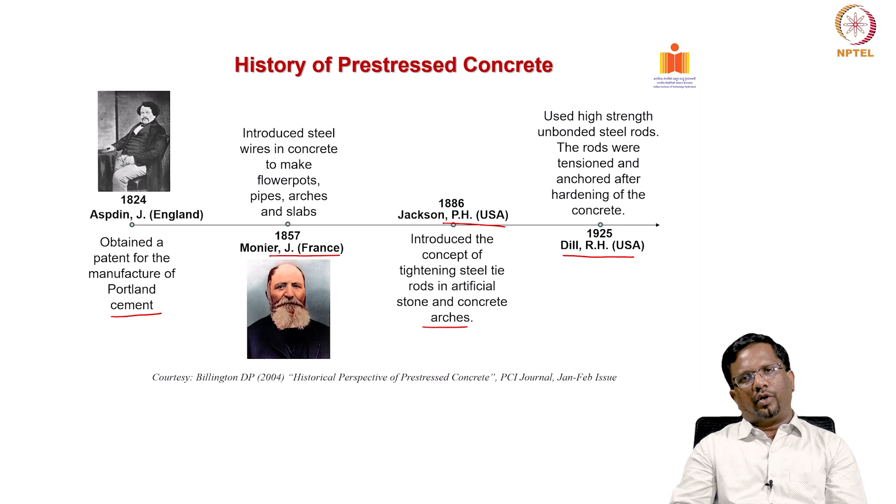Then in 1926, Eugene Freyssinet from France, also called the father of prestressed concrete, because he has been credited with employing high tensile steel wires as high as 1725 megapascal.

In earlier attempts of prestressing, they were not very successful because of losses in prestress. Freyssinet understood that if you use high tensile steel wires, you can go for a large amount of tension. Even if some tension is lost due to loss of prestress, a significant amount of prestress will still be left in the concrete, so it will not adversely affect performance.

He also developed conical wedges for end anchorages, and he also developed double acting jacks. These are some of the very significant contributions of Eugene Freyssinet - that is why he is also called the father of prestress.

Then in 1938, Hoyer in Germany invented a very nice method called the long line method of producing precast elements and prestressing them. That's a technique called pretensioning method, which we will discuss in detail, along with post-tensioning, in the coming modules.

Hoyer is the one who invented this long line method of pretensioning, used to produce pretensioned precast elements. Then in 1940, Gustav Magnel from Belgium developed anchoring systems for post-tensioning using flat wedges, and then prestressing applications flourished throughout the world.

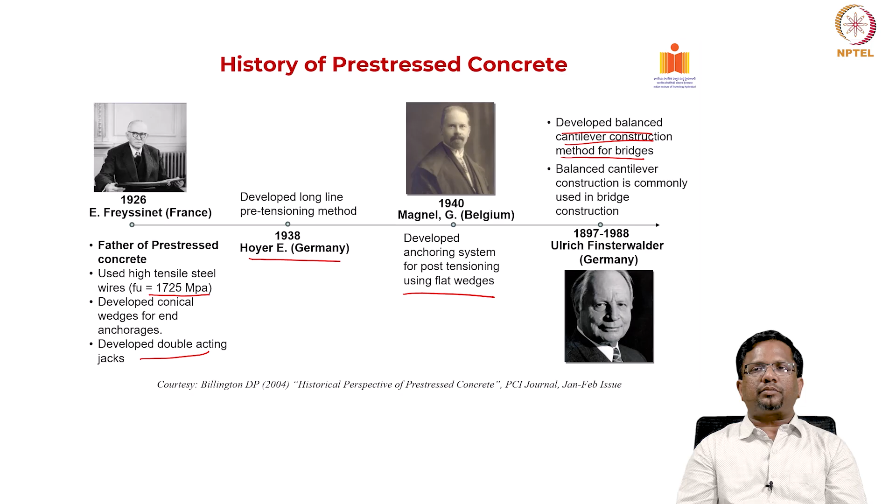Professor Gustav Magnel illustrated the concept of prestressing through a nice stacking of books, and he expanded the ideas of Eugene Freyssinet to the English speaking world, and also characterized the potential of prestressing. This is one of the very famous applications, Walnut Lane Bridge in Philadelphia.

It was one of the first bridges using prestressing, built in the year 1951, with a main span of about 48.5 meters. He helped in promoting the applications of prestressing in North America.

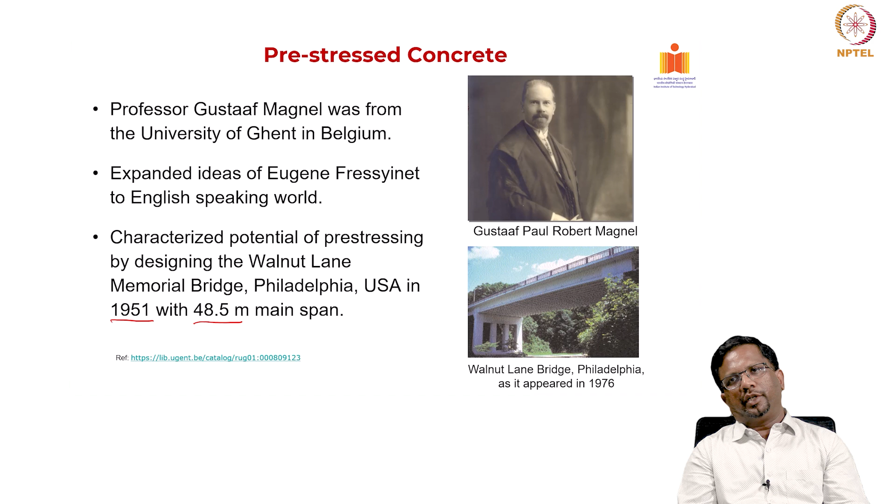Now let us see the variety of applications in India. You can see that the applications of prestressed concrete in India started as early as the 1940s.

The first applications were for airport hangars built by the British Indian Army at Meerut and Karachi - Karachi being in erstwhile India before partition. That was the first application of using pretensioned elements for constructing long span roof elements for building airport hangars.

Then for prestressed concrete bridges, the first bridge was built in 1948, using pretensioned precast concrete girders of 60 feet and 40 feet spans.

These were built to connect the Assam rail link project, a very famous project which provided connectivity from Assam to the rest of India, and they were used for constructing a variety of bridges using prestressed technologies across the rivers Tista, Torsa and Sankosh.

Another classical example is the Pamban Road bridge at Rameshwaram, which is a very classic example of using prestressed concrete, particularly in a marine environment.

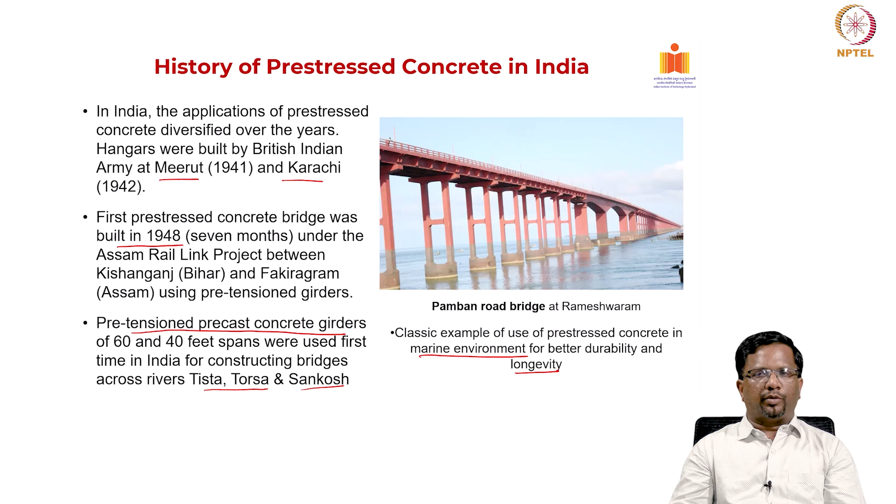Engineer Karnail Singh is again one of the pioneers in promoting prestressed technology in India, and he was actually the chief of this Assam rail link project that we discussed in the previous slide.

This is also a nice application, the Kolia Bhomora bridge in Tezpur, Assam. You can see this is a prestressed concrete box girder bridge done using segmental cantilever construction, where precast segments are progressively prestressed from one end, either end. That is why it is called balanced segmental cantilever construction. There were multiple spans like this, built using prestressed concrete box girder with segmental cantilever construction.

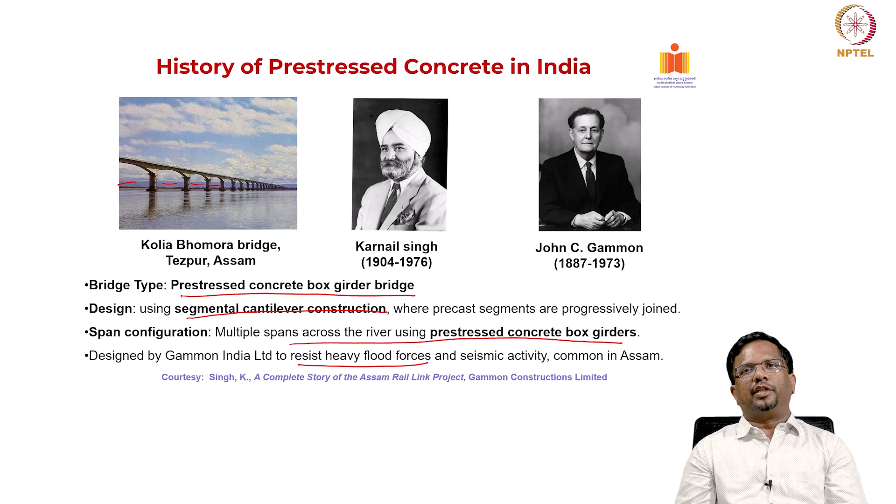This bridge was designed by Gammon India, and another important pioneer in promoting prestressed concrete application in India is John Gammon, who started Gammon India Limited. This pioneering Kolia Bhomora bridge was designed by Gammon India, built to resist heavy flood and seismic activity, which is very common in Assam. So these are some of the pioneers who have helped in promoting prestressed applications in India.

We also have another important consultant, Stup Consultants, one of the pioneers in promoting precast and prestressed construction in India. This is a very nice example of how we can use prestressed technology, a very interesting application which is a prestressed aqueduct.

Basically it transports canal water from one end to the other. The total length of this entire aqueduct is about 947 meters, and each span is about 41.5 meters. It runs for almost a kilometer and has been in operation since 1985. This is the first aqueduct in India done using match precast segmental construction, meaning the elements were made so that the end surfaces match when put together.

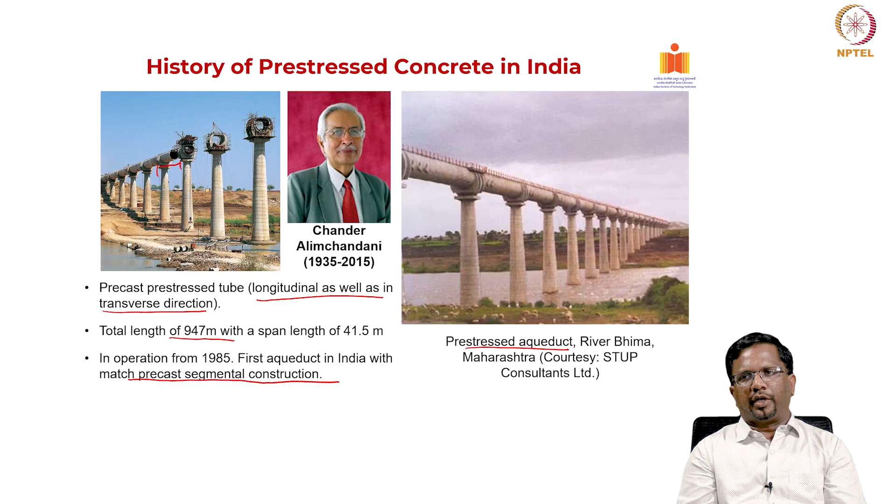This also has both longitudinal as well as prestressing in the transverse direction. Mr. Chander Alimchandani is one of the pioneers who was very instrumental in promoting precast and prestressed applications in India, and as I've mentioned, Stup Consultants is again one of the pioneers in promoting prestressing in India.

Now let's talk about why we need prestressing. This is a good example to illustrate how we can use prestressing and how it can be used for increasing the load before the system is going to crack. Now I have three cases.

The first case is a plain concrete beam, 6 meters in length. The cross section I will show you in the next slide. Now, if I start increasing this load W1, we want to see at what load it is going to crack. Now the second example is the same beam, same cross section.

Now if I squeeze this beam by applying compression like this, with an amount of compression of 750 kilonewton, I want to understand in the presence of this compression force, at what load the same beam, same span, is going to crack. This is a case of concentric prestressing.

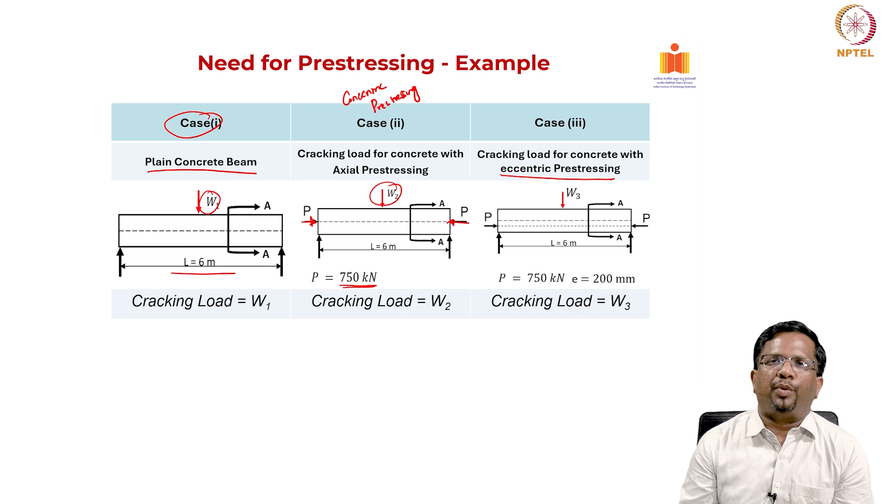The third one is an eccentric prestressing, where we can get more benefits. Same compression force, but now I am going to apply it at an eccentric distance - this is the eccentricity of the prestressing force. This eccentricity E I have taken here as 200 millimeters. Let us understand these three cases and see the effect of this prestressing.

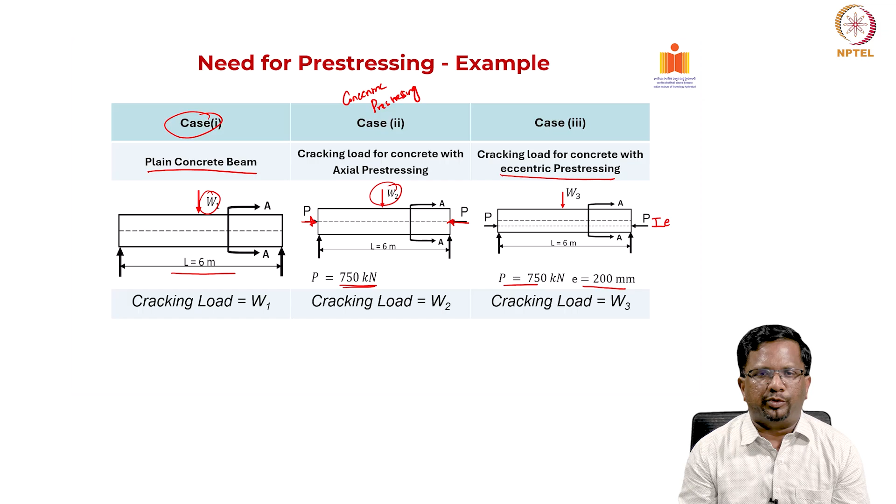One case is applying the prestress at the CG of the cross section along the length of the beam, and the second case is applying the prestressing at a distance of eccentricity 200 mm from the CG of the beam. Let us see how these load capacities compare before cracking. Now let us look at the first example, a plain concrete beam, with a section of 300 mm by 500 mm.

And I am also taking this as 40 megapascal. So, 40 megapascal is the cylinder compressive strength. Now, you can ask me what is a cylinder compressive strength.

Typically we use cube for testing concrete material strength in compression, but it does not exactly represent the true material strength of the concrete. So I have taken here cylinder compressive strength, which is a true representation of the material behavior of the concrete.

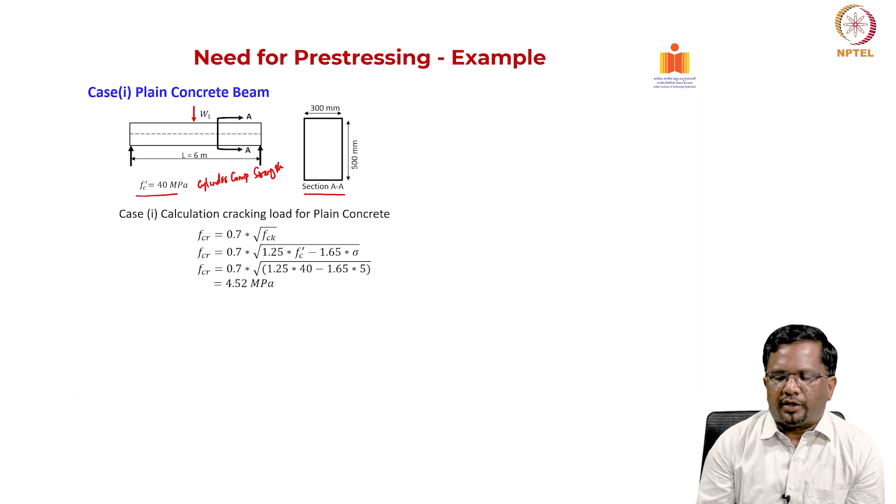Now from basic flexure theory, from Euler bending theory, I can calculate the stress in the concrete by F by Y is equal to E by R. So this is your basic bending theory.

Now I want to calculate at what moment it is going to reach the flexural tensile strength. What is this F? F here should be flexural tensile strength. So what is flexural tensile strength? The flexural tensile strength is nothing but modulus of rupture, which is what this FCR is, which is modulus of rupture.

As you can see, the modulus of rupture is a flexural tensile strength, which is typically given by 0.7 square root of FCK. Now what is FCK? FCK is a characteristic compressive strength of concrete, and this is a cube compressive strength.

Now there is a relationship between cylinder and cube compressive strength. The cube strength is typically 1.25 times F prime C, and I have to subtract also 1.65 times the standard deviation, because characteristic strength is the strength of the material only. You are expected to have 5% failure. It is 95%. 95% of the samples are expected to have value above the characteristic strength. You know that, you have studied in reinforced concrete design.

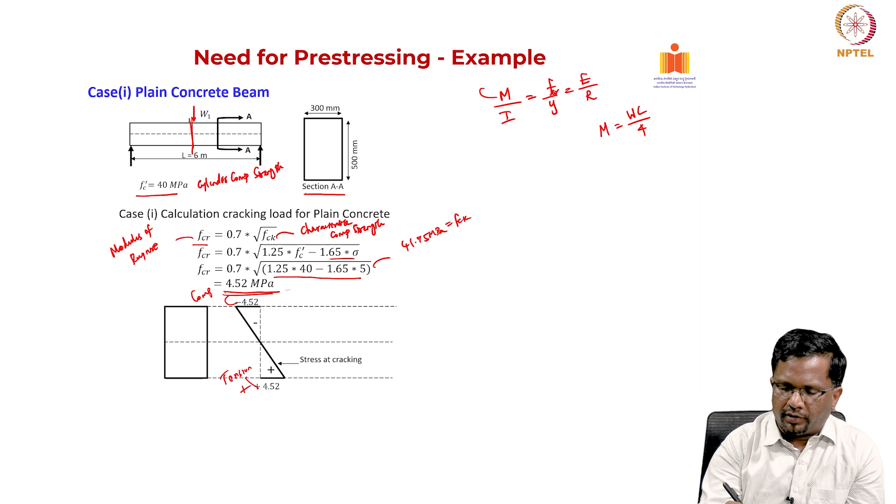So again, I am taking this as tension and this as compression. So I am taking positive as tension, compression is negative. So you see here, if you go back and put your basic bending equation, we can write the stress divided by the distance of the extreme fiber y from the neutral axis should be equal to m by I, or in other words, moment is given by sigma into Z, where sigma is your stress.

Now we want to calculate what is the cracking moment. So what is the cracking moment we want to calculate? Cracking moment is stress multiplied by section modulus, which is Z we know, which is equal to I by Y.

So you can see here, now what is the stress at which it will crack? We have calculated flexural tensile strength is 4.52 megapascal. So I put this 4.52 here. And what is the section modulus? Section modulus for this particular section is Z is going to be B H square by 6.

So I substitute B, H is 500 square, and then the units, everything we are multiplying it. And I want it in kilonewton meter, that is why I multiplied by 10 to the power of minus 6. So if you substitute that, you will get the moment at which it is going to crack is going to be 56.5 kilonewton meter.

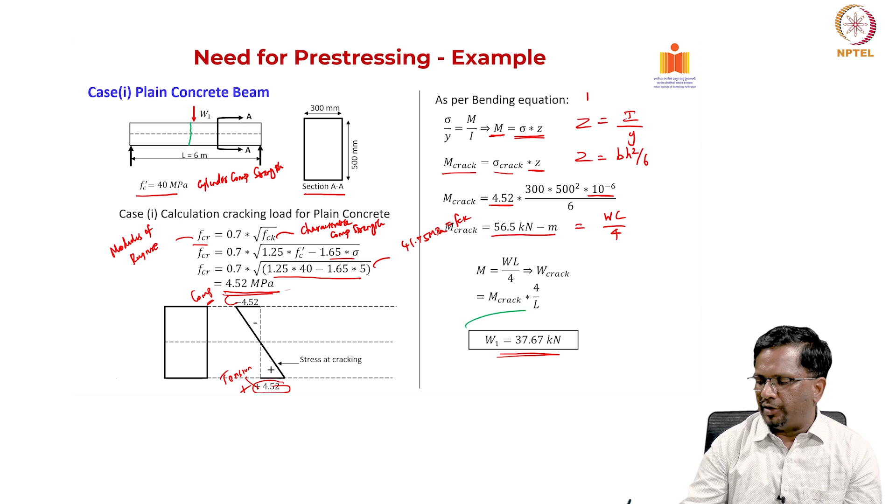Okay, now let's go to the next case. Again, go back - this load is 37.7 kilonewtons. So please remember this number and let's look at the next case.

Now we are going to case 2. What is case 2? Same cross section 300 by 500 and same length 6 meter. Now I am also applying this concentric prestress of 750 kilonewton. So basically I am squeezing the concrete and putting it in some compression. Now let us calculate what that compression is, and again my idea is to calculate at what load this is going to crack.

Okay, let us calculate. Now what is the level of pre-compression that we are putting? I am applying this pre-compression at the cross section, so compressive stress is going to be P by A, which is 750 into 10 to the power of 3 divided by the cross section, 300 by 500, which works out to be 5 megapascal. So that is what we have written here, P by A, which is 5 megapascal.

Now you see here, what we previously calculated, my FCR, flexural tensile strength, is 4.52 megapascal. So this is from pre-stress and this is from load, external load. This plus this should give me this kind of profile where the bottom fiber should reach FCR - that is the idea.

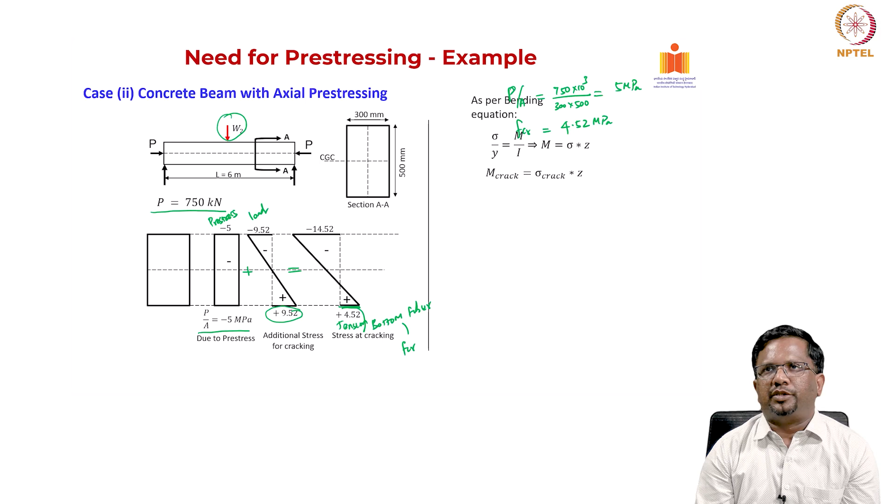So you see here again, the basic thing is this: sigma crack times Z will give me M crack. Now what is sigma crack that I need to put, what value do I need to take? I need to take this value - basically 9.52 is the stress that I need to apply externally, so that the net stress will become tension of 4.52.

So previously, if you go back, how much did we calculate for? We calculated only for 4.52. Now, how much stress do I need to create due to external load? I need to create 4.52 plus 5 megapascal, then only I will be having a net tension of 4.52. So higher the stress, higher should be your moment at cracking - that is what we get, which is 119 kilonewton meter.

Now if you substitute and calculate what is the load required to crack, you can see here it has become 79.33, which is more than double that of what we had for plain concrete. So you can see here, just by applying this 5 megapascal compression, the load at cracking has increased significantly.

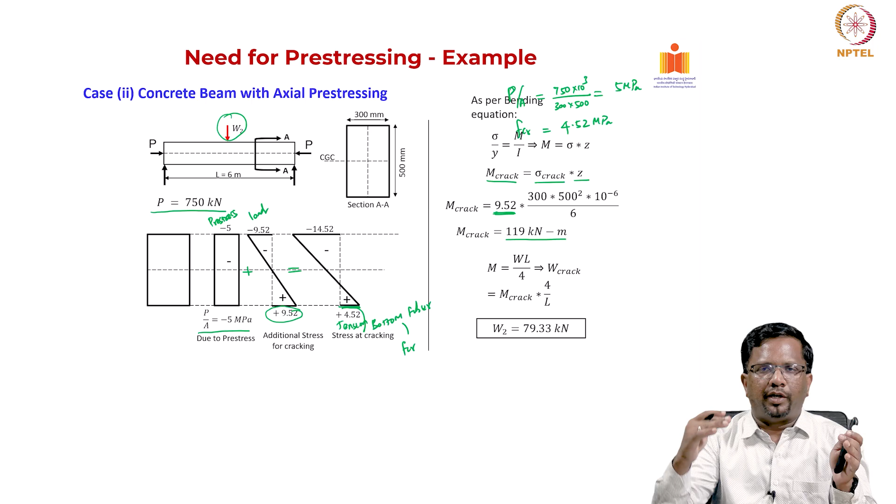And now I want to even make it more efficient. The same compression - now instead of applying it in a concentric way, if I am applying it in an eccentric way, then I get more benefits. So let us look at that in the next case.

So that is what we have: concrete beam with eccentric prestressing, everything same. Now the only thing is, this is my eccentricity from here to here, which is 200 millimeter. So if you see again, this axial component still remains the same, 5 megapascal. Now in addition to that, I am also applying a prestressing moment, how much am I applying - which is P into E, that means 750 kilonewton into eccentricity, which is 0.2. So this is a moment that I am applying, almost 150 kilonewton meter due to prestress.

Now, where is that eccentricity? Eccentricity is at the bottom. So, the bottom fiber will be in compression, top fiber will be in tension, right.

Now, what will be the stress introduced due to prestress? This is due to prestress, this is axial stress again from prestress, and this is moment due to prestress, MP.

So, if you see here the stress, how do we calculate? Again, moment is divided by section modulus. P into E we calculated as 150. Section modulus we already calculated, which is BH square by 6, so 300 into 500 square by 6. If you substitute that, you get negative 12 megapascal.

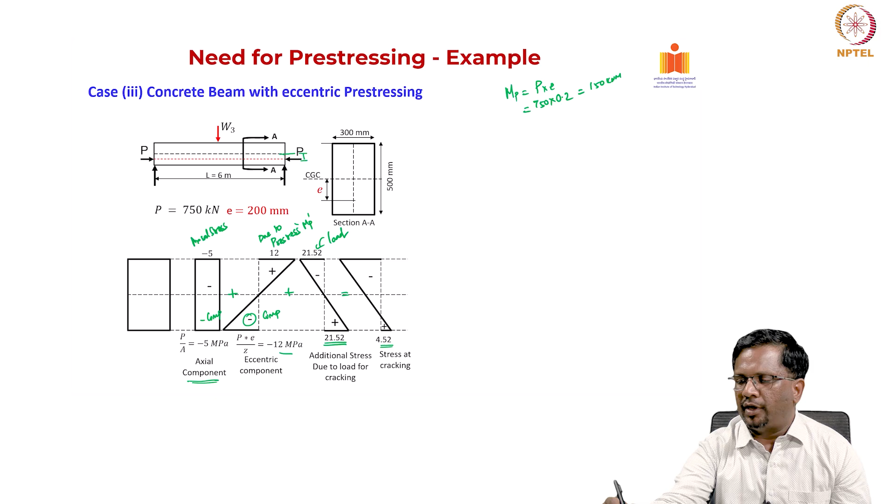So, now how much should I add so that the net becomes plus 4.52? So, minus 5, minus 12, then plus some x should give me 4.52. Now, what should be x? X, you can see, is going to be equal to 21.52 megapascal.

So, I should create a stress of 21.52 megapascal from external load, then only the bottommost fiber is going to be in tension, it will lead to crack.

Now, you see here, now I am applying a very high stress due to external load. So, let us calculate what we are getting out of it. So, the moment at cracking is going to be stress at cracking multiplied by section modulus.

So, stress at cracking now is going to be 21.52. The first case we had only 4.52, then we increased it. Now, because of eccentric prestress, I am getting a very high magnitude. This is one big advantage, sigma crack into Z.

So, if you substitute that, I am getting a cracking moment of 269 kilonewton meter, and if I put it in the load equation where moment equals WL by 4, and calculate W cracking, I get W cracking as 179.33. So, you see it is a very high increase in your load at cracking.

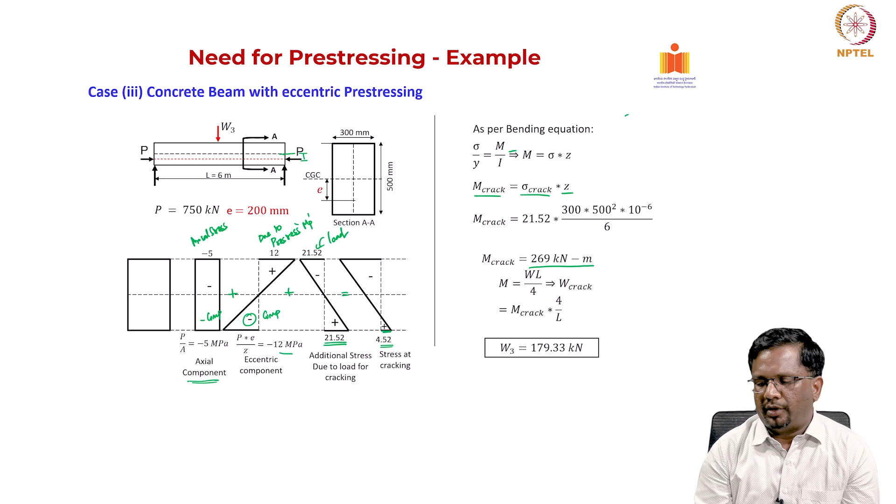Now, one catch here, I just wanted to explain this. Now, what is the problem with this: if external loads are not there, what would be the stress at the top? Let us say that I do not have this external load. So, if I have only these two, no load, then what will be the net stress at the top?

It will be minus 5 plus 12. So what is that you will get? You will get plus 7 megapascal. Is it good or bad? In this case, purposefully we have chosen numbers in such a way to illustrate that sometimes if you apply too much pre-stress, you will have a problem.

Why is it a problem? If no external loads are acting, only due to pre-stress, the top is getting into plus 7 megapascal, which is greater than your FCR. That means if you put too much pre-stress, you can also have cracking at locations where you do not want it.

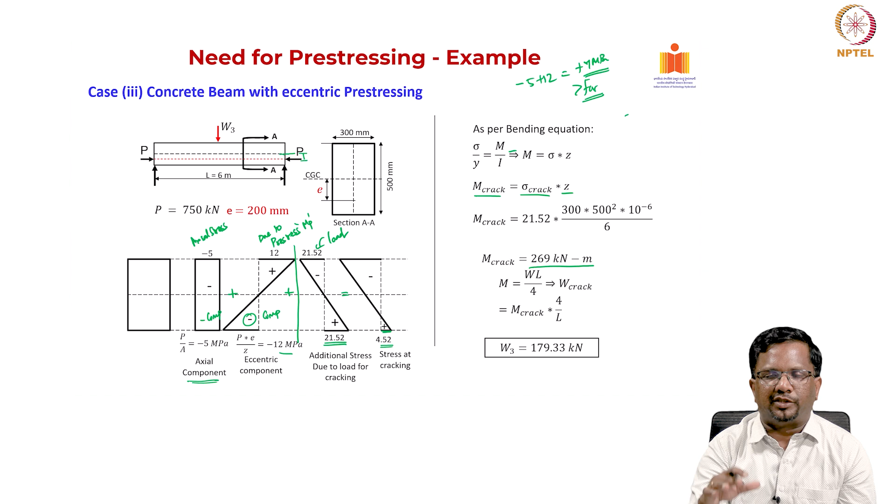So, the top fiber can get into tension and it can lead to crack. Purposefully we have chosen a slightly higher number to illustrate this point, but typically we do not do that. We keep stress limits so that you do not apply too much pre-stress, right.

So, now let us summarize this example. The first case we had 37.67 kilonewton. The second case I am able to apply almost 79.33. So that means an increase, right, that is the load increase that we can get.

In fact, it should be double, right. I think this number is wrong, so this is not correct. You can get 79.33 divided by 37.67 - that is the amount of increase that we are getting.

And the third case you can see here, almost it is increased 179 by 37.6. So again you are getting a high increase in capacity, that much times increase in your cracking moment loading capacity. So 179.33 divided by 37.67 is the increase in capacity.

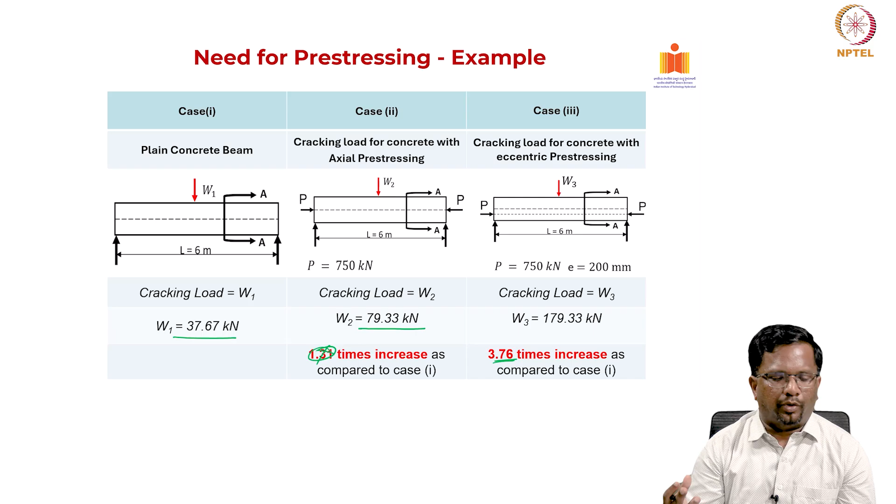So you can see here, by applying pre-compression, I am able to get a very high increase in your loading at cracking. Okay, that's the idea.